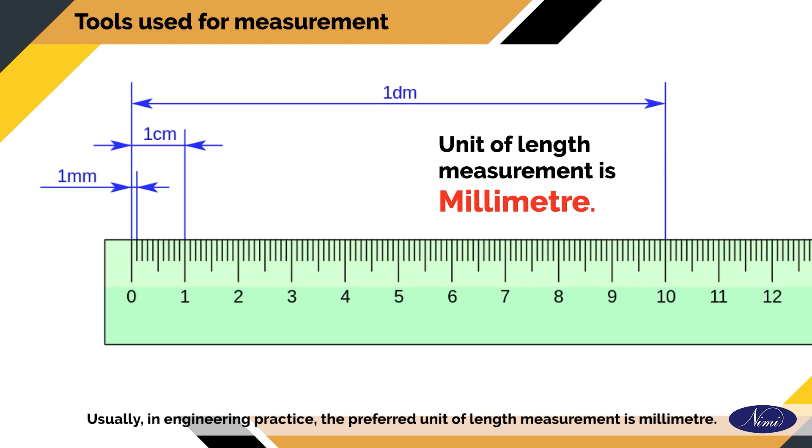When we measure an object, we are actually comparing it with a known standard of measurement. In this video, we will understand how to measure, mark and cut a workpiece to make open fitting of curved profiles. Usually, in engineering practice, the preferred unit of length measurement is millimeter. Here are some tools that are used to measure the workpiece.

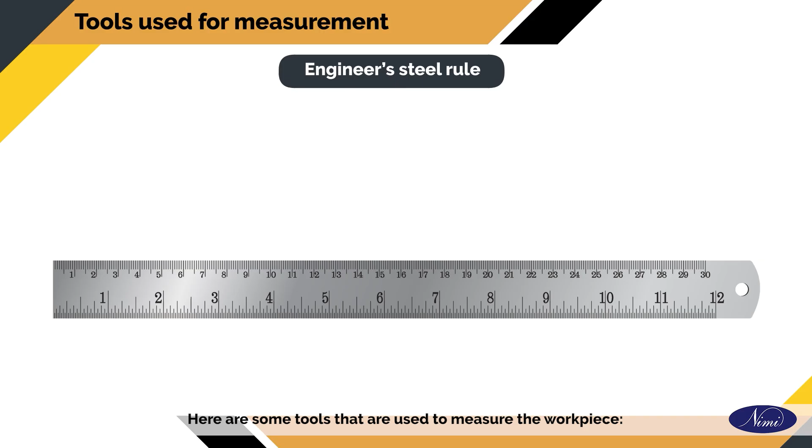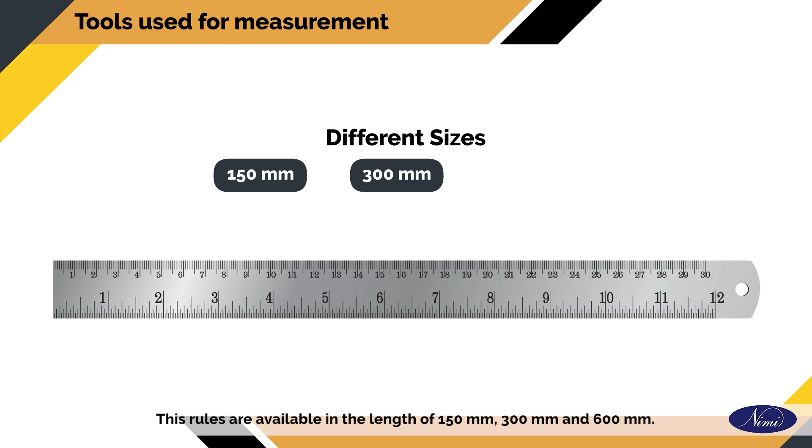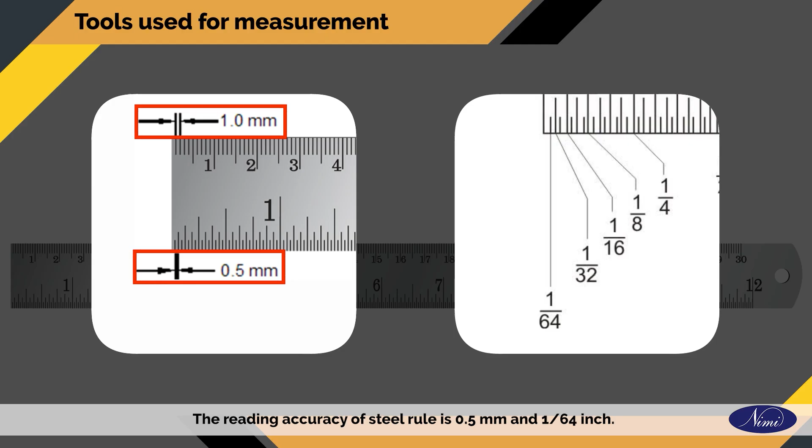Engineer's steel rule. It is made up of spring steel or stainless steel. These rules are available in the length of 150 millimeters, 300 millimeters, and 600 millimeters. The reading accuracy of steel rule is 0.5 millimeters and 1/64 inch. For accurate reading, it is necessary to read vertically to avoid errors arising out of parallax.

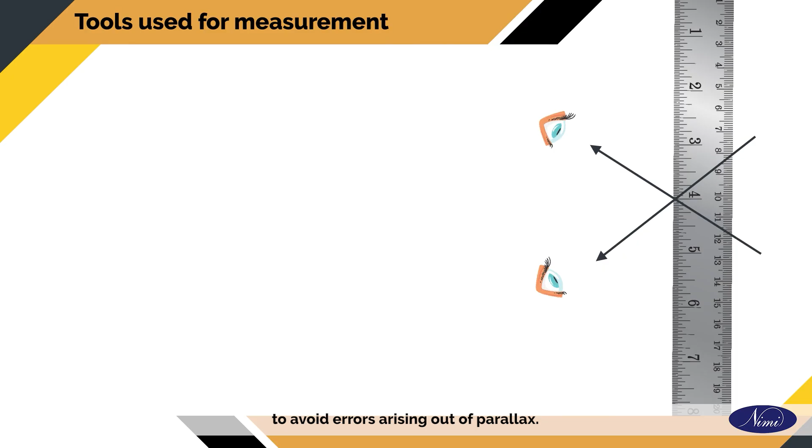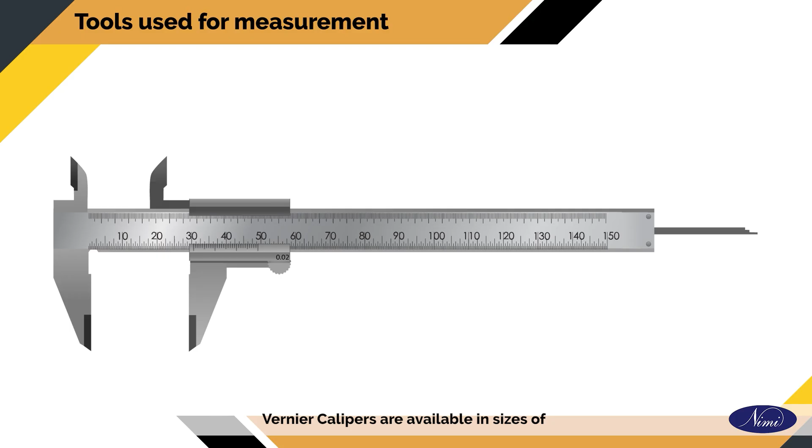Vernier caliper. A vernier caliper is a precision measuring instrument. It is used to measure up to an accuracy of 0.02 millimeters. Vernier calipers are available in sizes of 150 millimeters, 200 millimeters, 250 millimeters, 300 millimeters, and 600 millimeters. The selection of the size depends on the measurements to be taken.

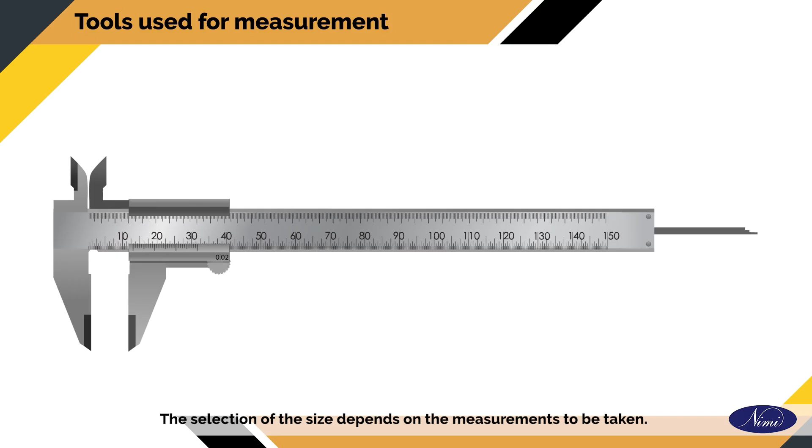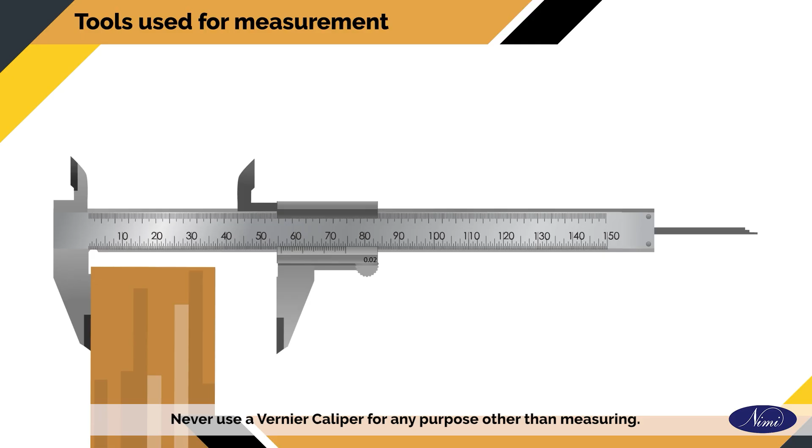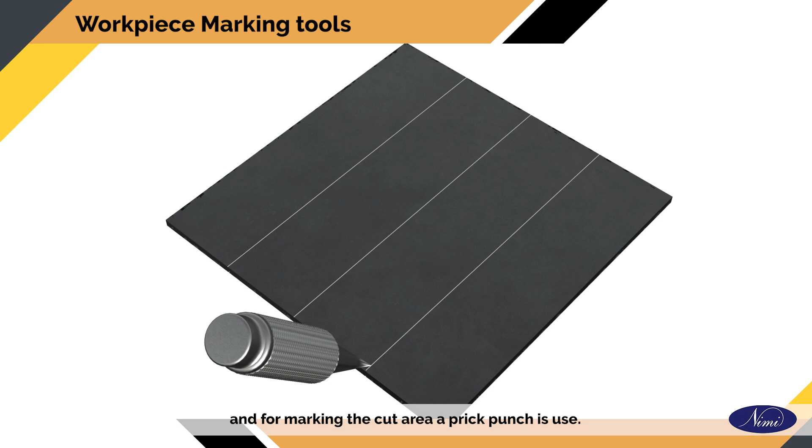Vernier calipers are precision instruments and therefore extreme care should be taken while handling them. Never use a vernier caliper for any purpose other than measuring. Vernier calipers should be used only to measure machined or filed surfaces. In layout of the workpiece, it is necessary to scribe lines to indicate the dimensions of the workpiece to be filed or machined. And for marking the cut area, a prick punch is used. Let us now see each of these tools.

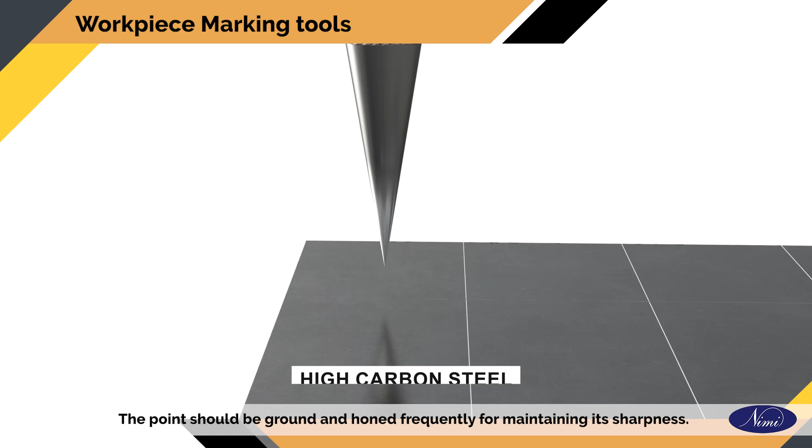Scribers. The scriber is a tool used for drawing clear and sharp lines. The point should be ground and honed frequently for maintaining its sharpness. It is made out of high carbon steel about 3 to 5 millimeters. For drawing clear lines on sheet metal, working point is ground at one end to the angle of 10 degrees to 20 degrees. Scriber working point is hardened and tempered. Scribers are available in different types and sizes.

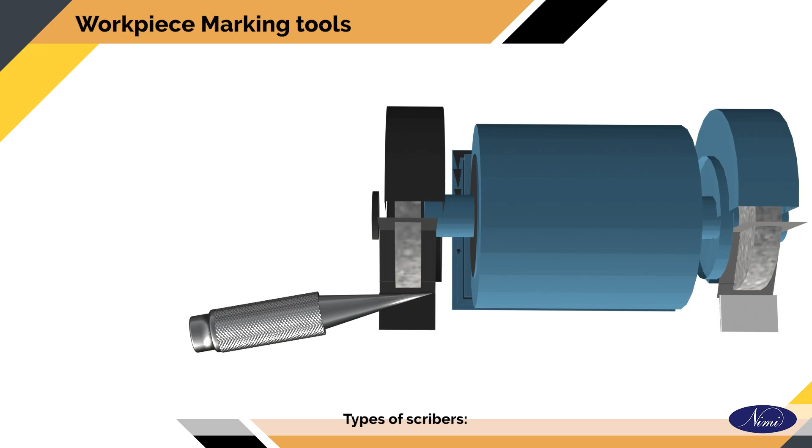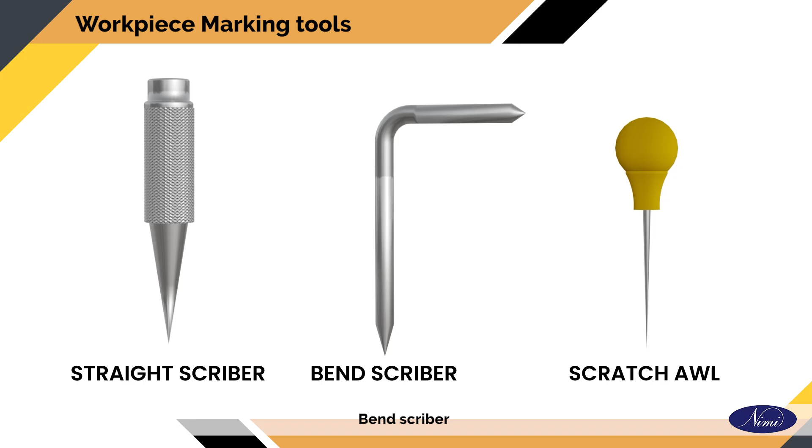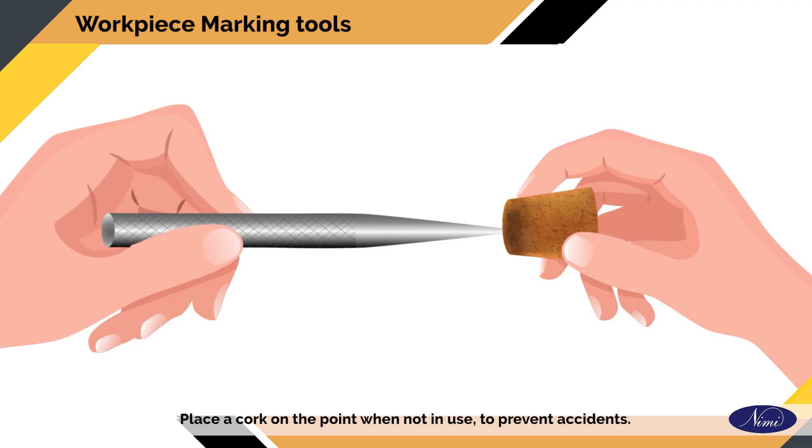Types of scribers: straight scriber, bend scriber, scratch awl. Scriber points are very sharp and they are to be handled very carefully. Do not put the scriber in your pocket. Place a cork on the point when not in use to prevent accidents.

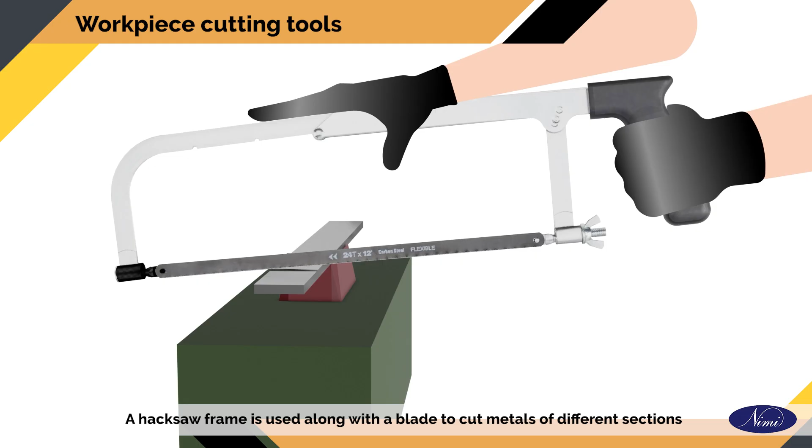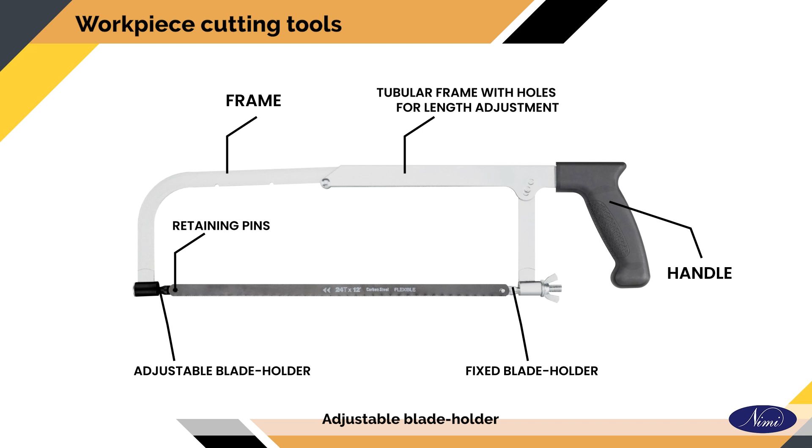A hacksaw frame is used along with a blade to cut metals of different sections and is specified by the type and maximum length of the blade that can be fixed. Parts of a hacksaw frame: handle, frame, tubular frame with holes for length adjustment, retaining pins, fixed blade holder, adjustable blade holder, wing nut.

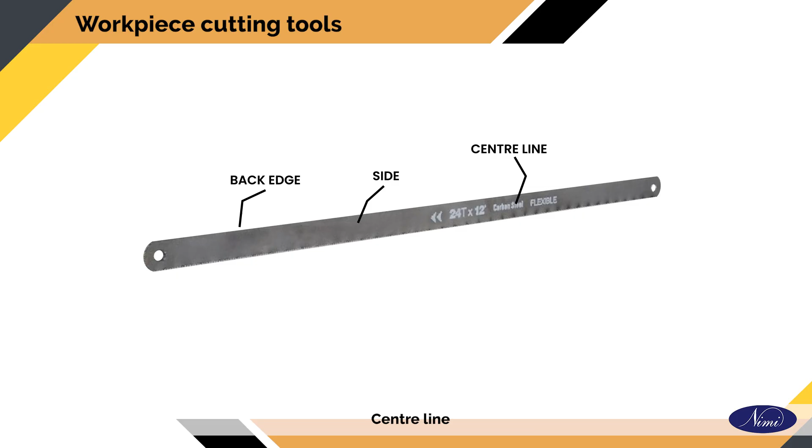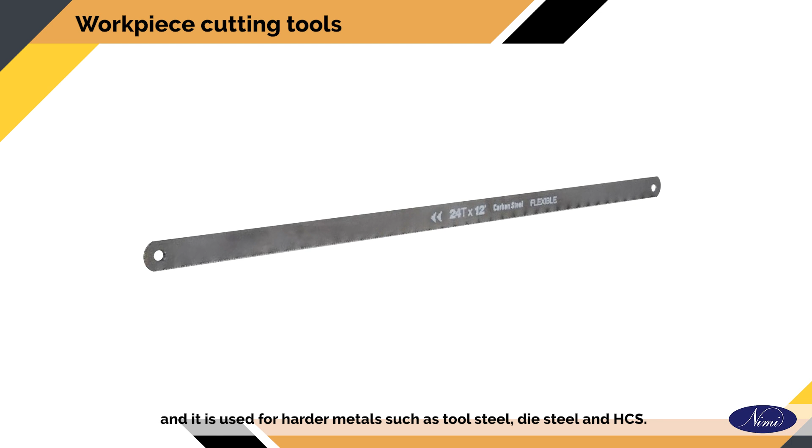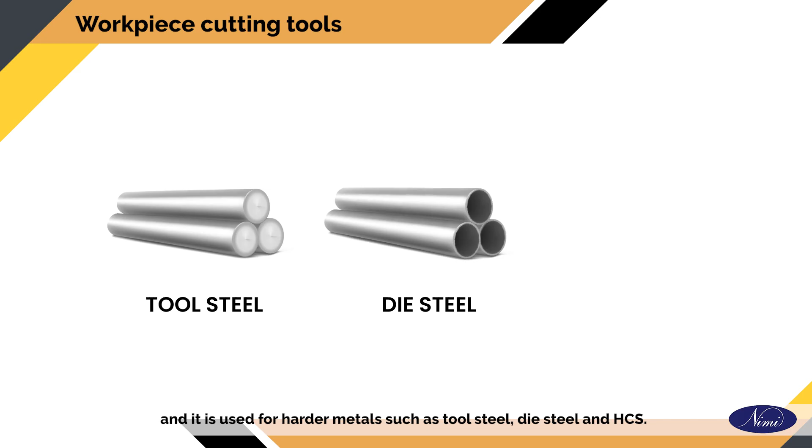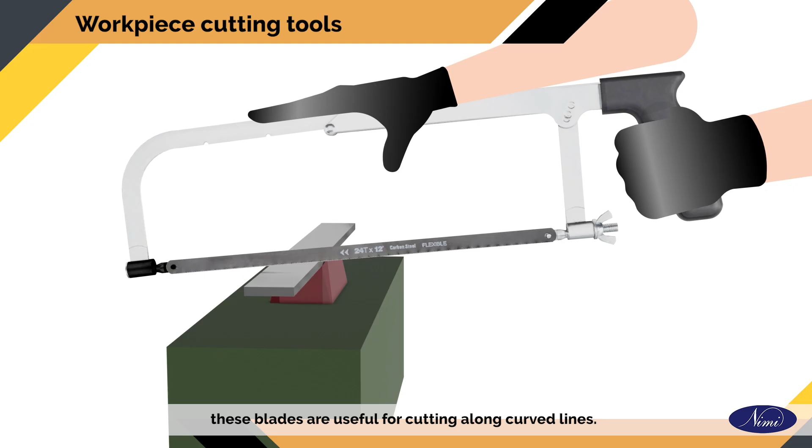Parts of a hacksaw blade: back edge, side, center line, pinholes. All hard blade. The full length of the blade between the pins is hardened, and it is used for harder metals such as tool steel, die steel, and HCS. Flexible blade. Only the teeth are hardened. Because of their flexibility, these blades are useful for cutting along curved lines. Flexible blades should be thinner than all hard blades.

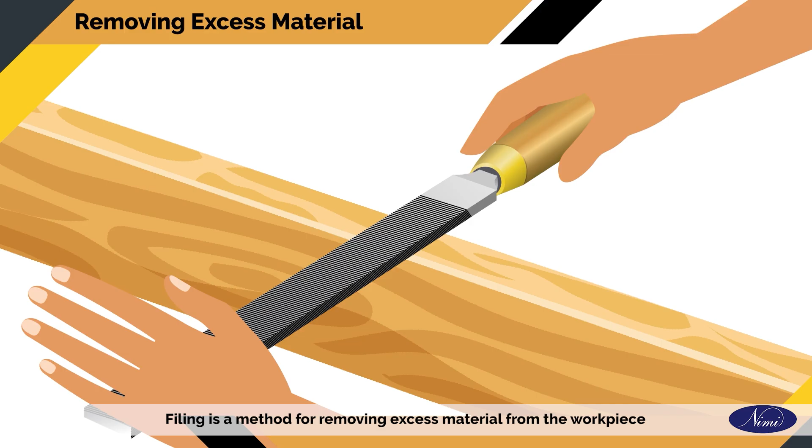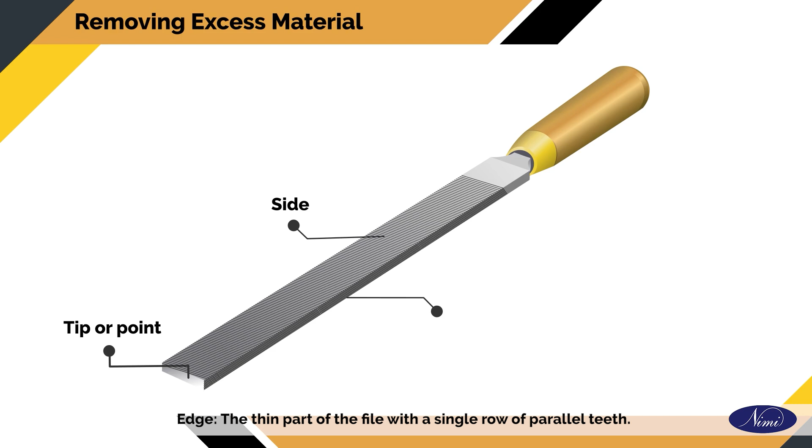Filing is a method for removing excess material from the workpiece by using a file which acts as a cutting tool. Files are available in many shapes and sizes. The parts of a file can be seen here. Tip or point, the end opposite to tang. Face or side, the broad part of the file with teeth cut on its surface. Edge, the thin part of the file with a single row of parallel teeth. Heel, the portion of the broad part without teeth.

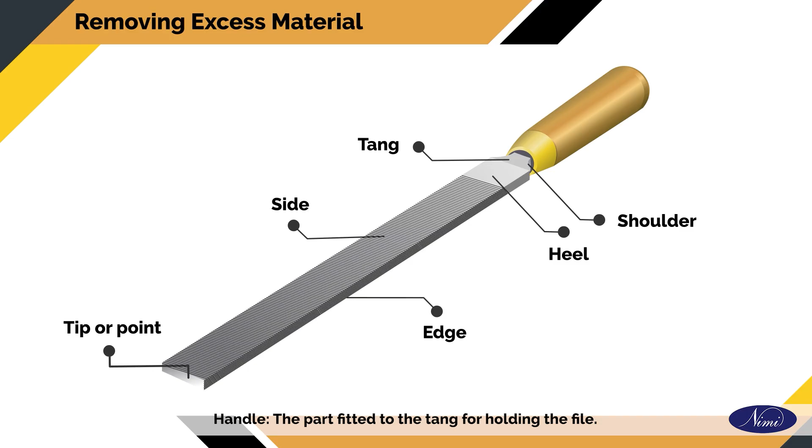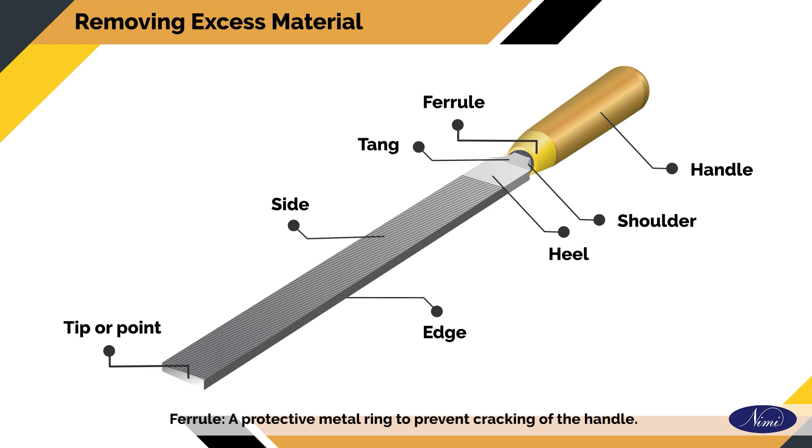Shoulder, the curved part of the file separating tang from the body. Tang, the narrow and thin part of a file which fits into the handle. Handle, the part fitted to the tang for holding the file. Ferrule, a protective metal ring to prevent cracking of the handle. Let us now see the job sequence to make open fitting of curved profiles.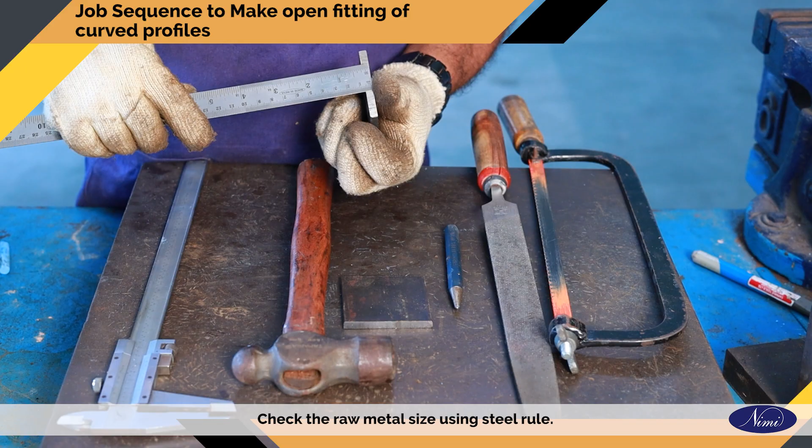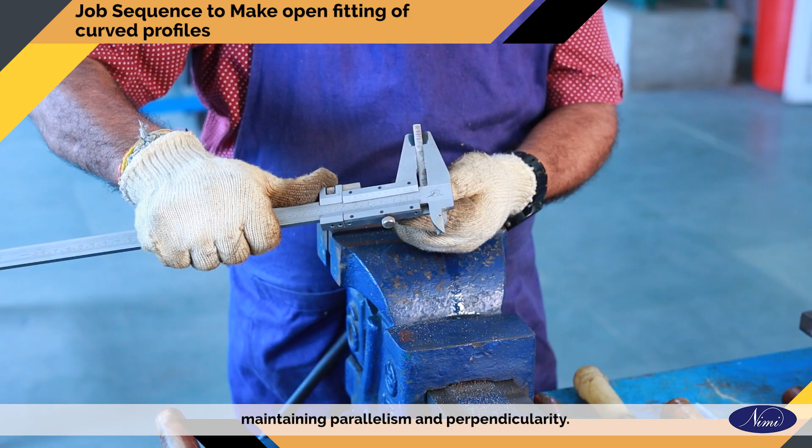Sequence 1. Check the raw metal size using steel rule. File and finish to overall size of 64 by 57 by 9 mm, maintaining parallelism and perpendicularity. Apply marking media. Mark in part 1 as per job drawing. Punch witness marks as shown. Cut and remove the hatched portion of excess metal in one side and file to the size and shape as shown in the figure. Check the size with vernier caliper.

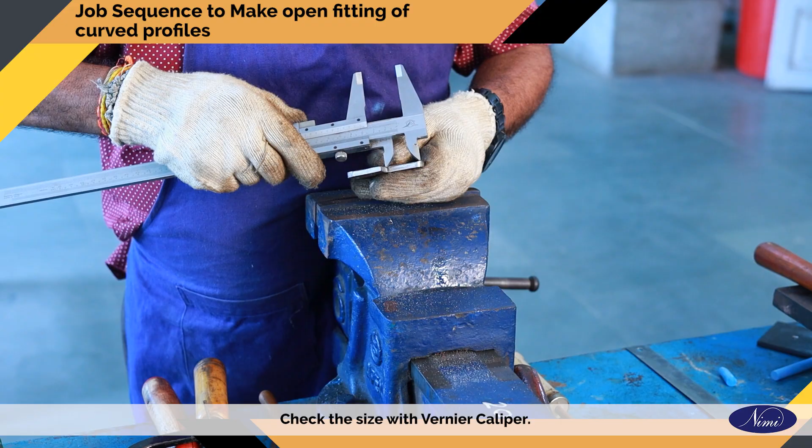Similarly, cut and remove the hatched portion of excess metal on other side and file to the size and profile as shown. Cut relief grooves by hacksaw. Cut and remove the hatched portion of excess metal on curvature side and file the curved profile to the size and check the curved profile with template and check the sizes with vernier caliper as shown.

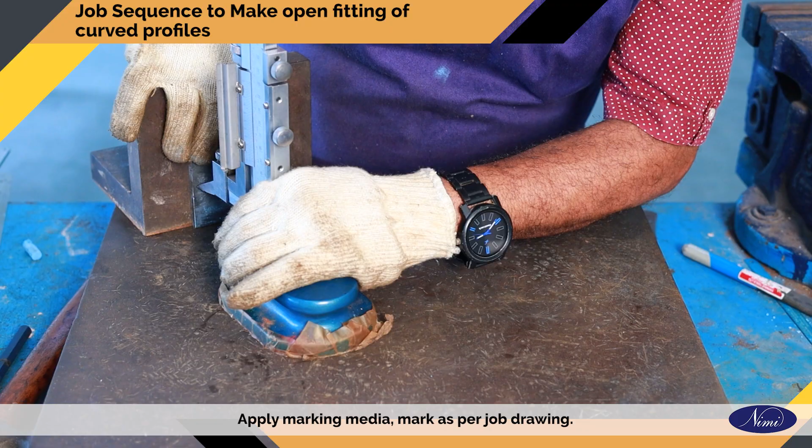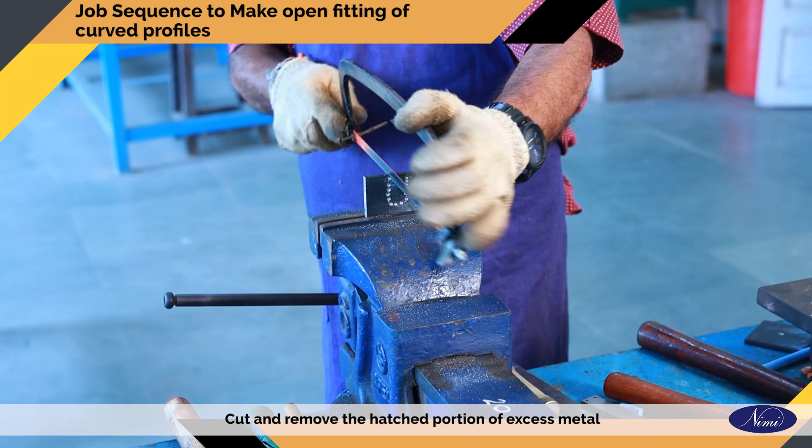Sequence 2. Check the raw metal size using steel rule. File and finish to the size of 64 by 51 by 9 mm, maintaining parallelism and perpendicularity. Apply marking media. Mark as per job drawing. Punch witness marks in part 2 as shown. Chain drill holes to remove excess metal. Cut and remove the hatched portion of excess metal and file to the size and shape.

Similarly, cut and remove the hatched portion of excess metal on curved profile side with hacksaw and file the profile to the size and shape. Check the curved profile with template and the size with vernier caliper. Match part 1 and 2 in both sides. Finish filing in part 1 and 2 and remove burrs in all the surfaces and corners. Apply a little oil and preserve it for evaluation.

In this video, we have learned the measuring instruments like vernier caliper and steel rule used to measure the dimensions of the workpiece. Marking dimensions with the help of scribers and marking cut sections using dot or prick punch. Uses of hacksaw to cut off the marked section on the workpiece to obtain the curved profile as per requirement.